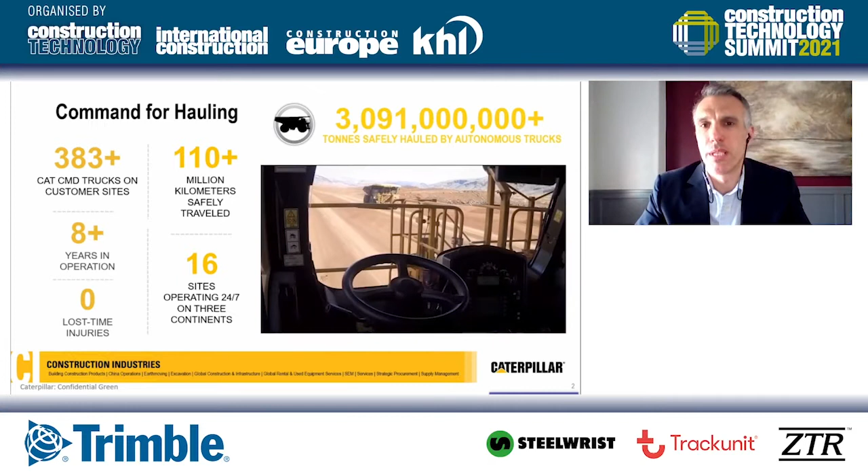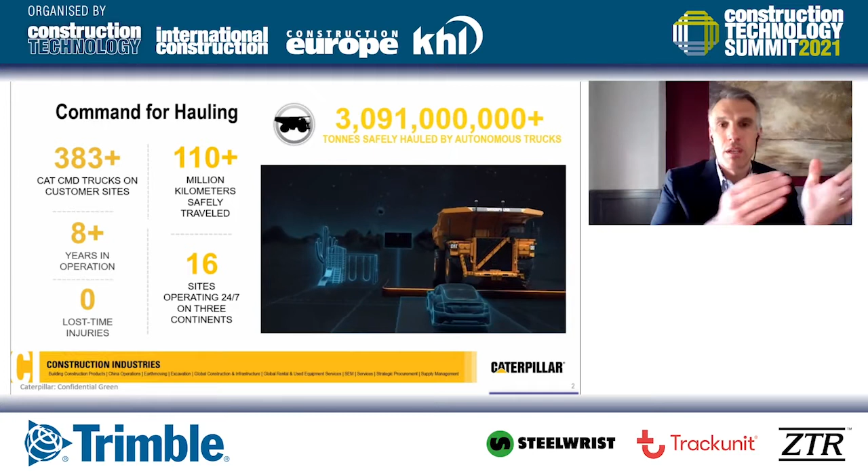As you can see, the stats speak for themselves: almost 400 trucks, 8 years in operation across 16 sites, running 24/7. They've hauled 3 billion tons over 110 million kilometers, and that's just the hauling piece. Of course there's also underground mining, drilling, and dozing in terms of autonomous solutions. So there's a lot of value there, and the holy grail of what autonomy brings is all that productivity with safety, with zero lost time injuries. That's really the great promise of autonomy - bringing both productivity and safety together. Typically you have to choose either one or the other.

As I'll go through the next slide, autonomy for mining was a very long journey. It probably took about 20 years to go from the early days all the way to having a commercial solution that could be scaled. In construction, it's going to be the same thing - a journey over time. Luckily, we've started that journey, and the poll speaks to it - many of you are on that journey.

That journey starts with automation, and you increase layers of automation until you have machines that can perform certain operations in an autonomous mode, or maybe even fully automated or autonomous at a machine level. At the same time, we need to make sure all the automated machines, and possibly the manned ones, are able to work together to automate the site. So keep three concepts in mind: we're on a journey of increasing automation, which will lead to machine autonomy, but machine autonomy is only one of the steps on the journey - really, site autonomy is the destination.

So if you were to ask, what are the three ingredients for autonomy for construction? We'll break it down into three main components. The first one is we're going to have to transform our machines into robots. And that's a journey that we've been on for a couple of decades or so.

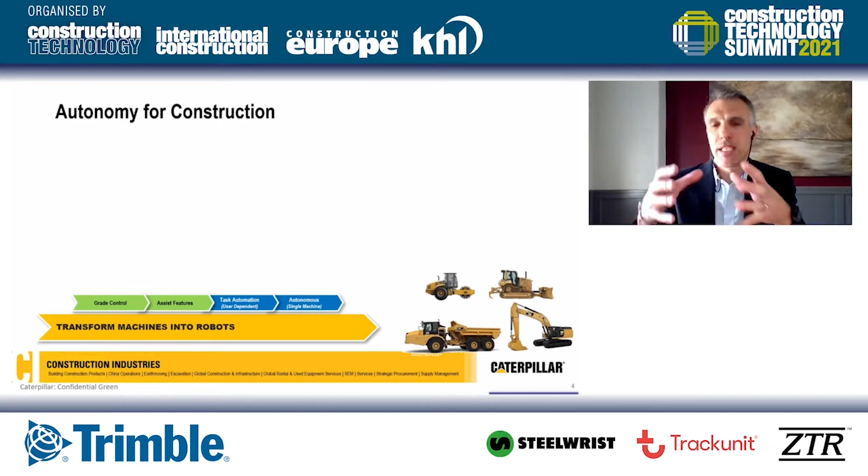Some examples of that are full blade automation with grade control. That is really a semi-autonomous function where the operator is driving the machine, displacing the machine, but the blade operation is fully autonomous. So that is a form of an assist function, and that is exactly how automation is going to manifest itself, as increasing layers of assist for the operators. Eventually, those assist features will allow task automation, and when we can automate several tasks, then we'll automate operations.

The second piece is, once we have machines that are semi-autonomous, or can perform tasks on their own for some period of time, we will have to make sure we can get the operator off the machine so that the same operator can tend to several machines at the same time. That's really where we've coined the phrase, turn the operator into a commander. And that's an offering that's available today.

We're debuting this year the command station, which allows operators to operate several machines of different sizes and types, switching between them with just the push of a button. So imagine, for example, if we picked the excavator in this image, and that excavator could auto-trench for probably 15 minutes on its own before it needs some assistance from the operator.

If the operator's in the cab, then we really haven't maximized our operator's time. But by placing the operator into a remote setting that could be 300 yards or 300 miles away, now that operator can get the excavator auto-trenching and then take control of another machine, possibly a manned machine, and now they can be operating two machines at the same time.

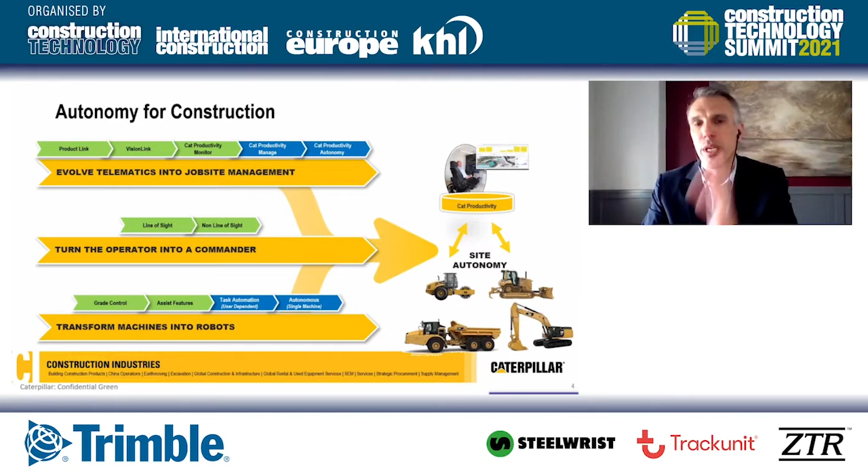As we started with telematics, we evolved telematics into really what today is a job site twin. And then we're going to move from monitoring capabilities to predictive or prescriptive capabilities, and then eventually controlling the autonomous machines. So you can see in green what is commercially available today, and in blue what we are developing, with the intent of developing simple point solutions that you can deploy easily into your job site without disrupting much of your existing processes.

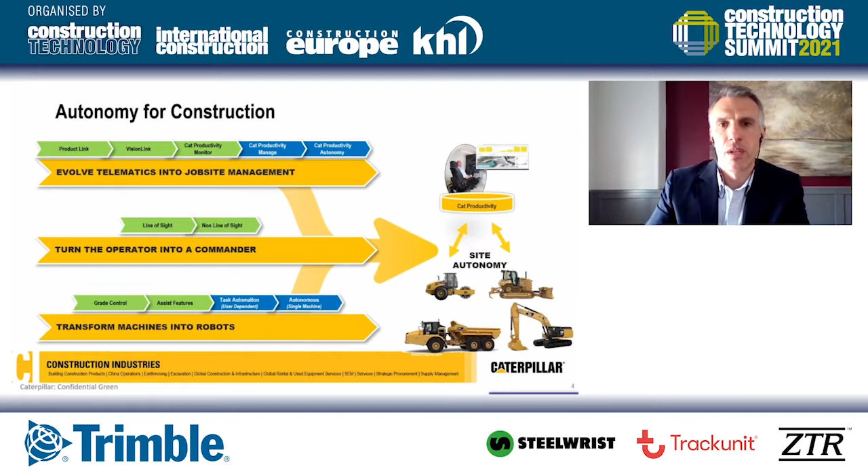And then once you've been able to incorporate one of these technologies, you can extend to the next one, and the next one, and over time turn your job site into an autonomous job site. So let's look at a short video that will show an example of how this could come to life. Let's go.

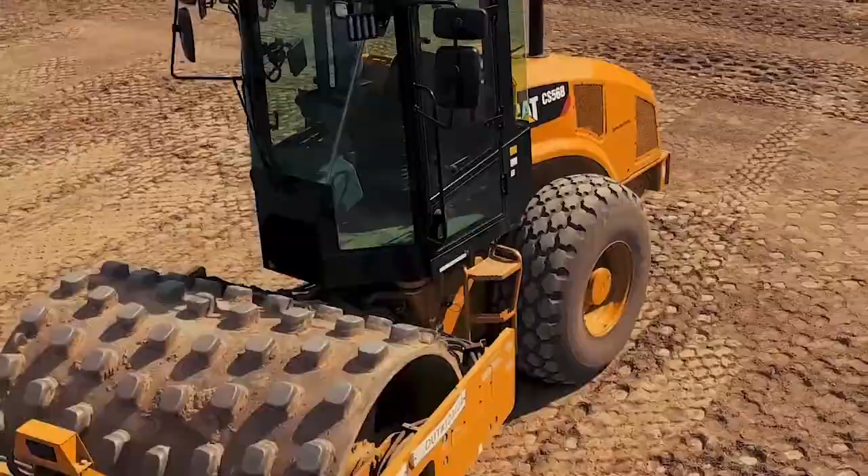Caterpillar's roadmap to autonomy consists of three main technologies: robotic machines capable of executing missions in full autonomy, the use of remote control capabilities to shepherd the machines around the autonomous job site, and a back-office software that creates machine missions in order to achieve the goals of the day.

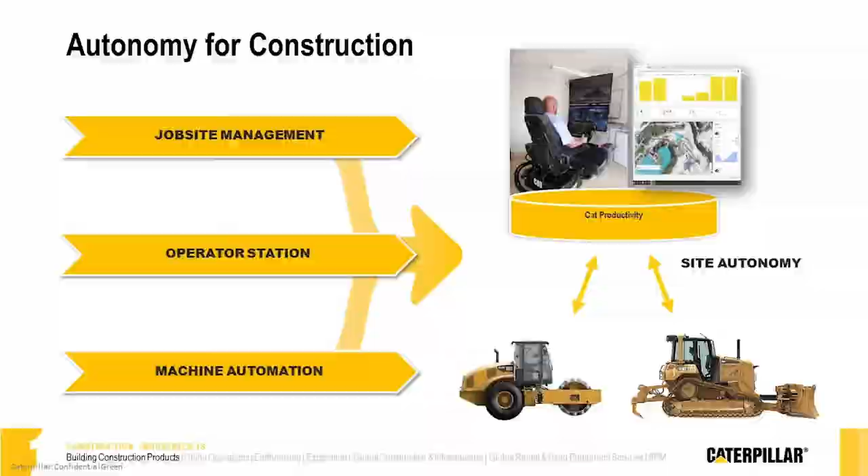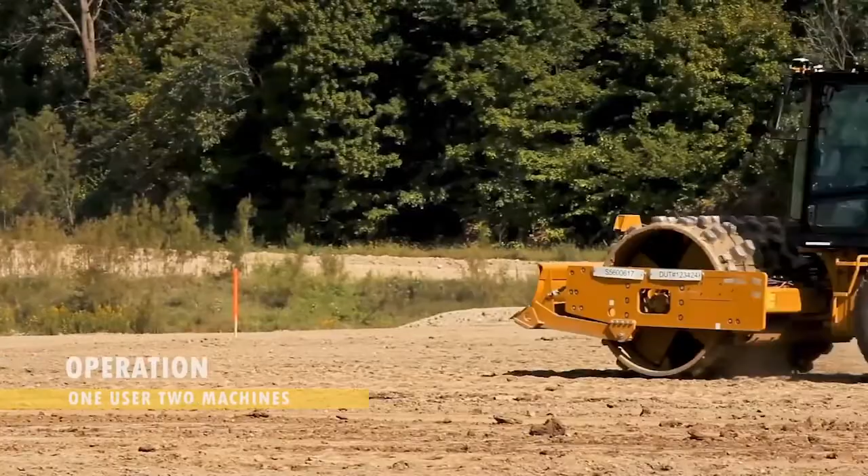In the following sequence, you'll see how these technologies come together to enable a single person to use two machines simultaneously to perform a grading operation. The process begins as the project engineer creates a task for the field teams to execute.

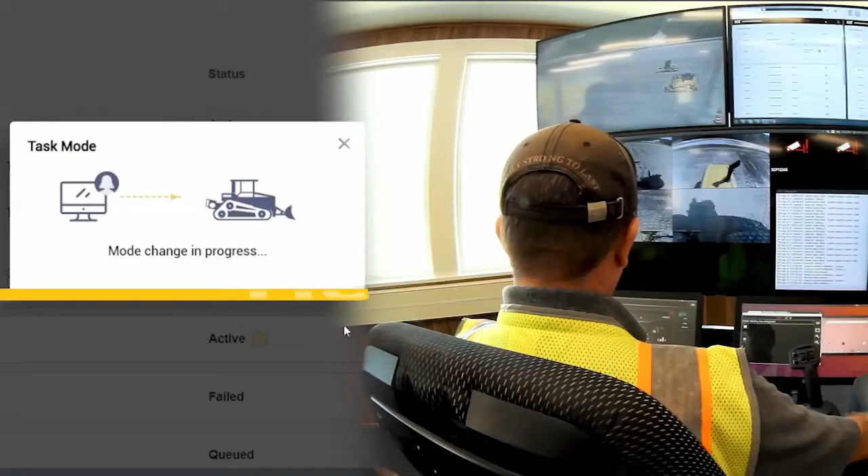The task is later accepted by an operator who uses remote control to perform the grading operation using a highly automated tractor.

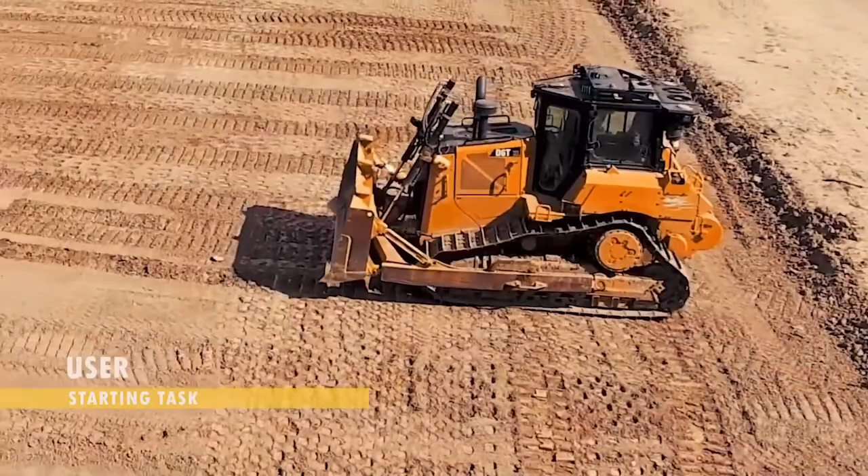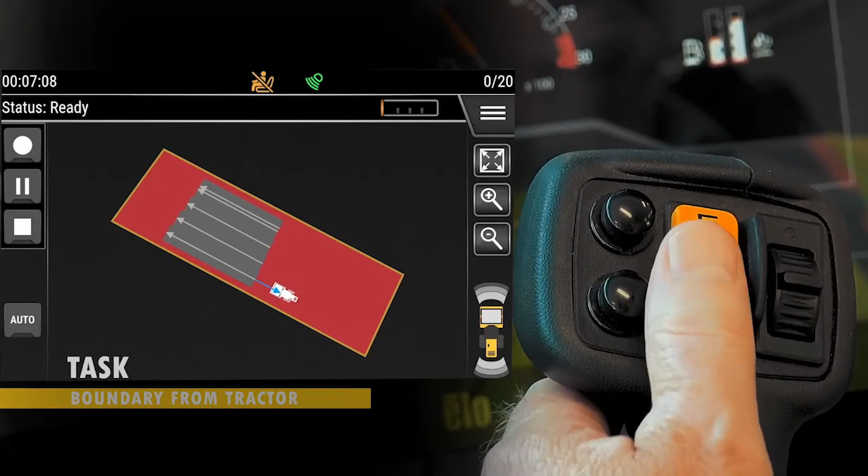The back office continuously monitors the progress made by the tractor. And as the tractor levels out enough ground, the back office creates a mission for the compactor to execute. The operator receives the mission and dispatches it to the autonomous compactor.

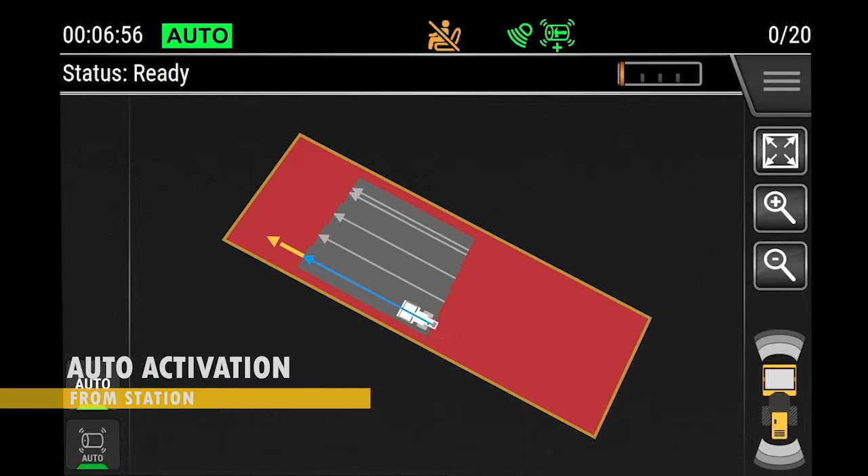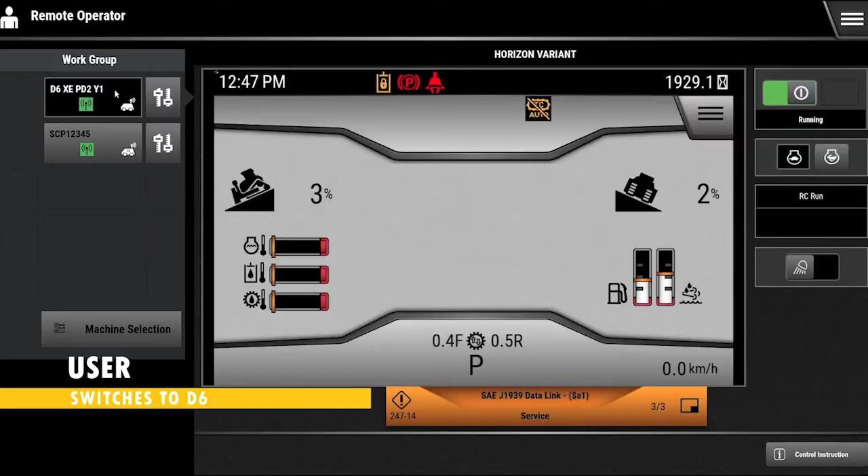The compactor receives the mission and determines how best to accomplish it. As the compactor begins to work autonomously, the operator takes back control of the tractor to resume grading. As he makes progress with grading, the back office AI will be sure to dispatch the compactor to follow.

This illustrates how back office AI, remote control, and machine autonomy come together to enable a single person to operate multiple machines simultaneously.

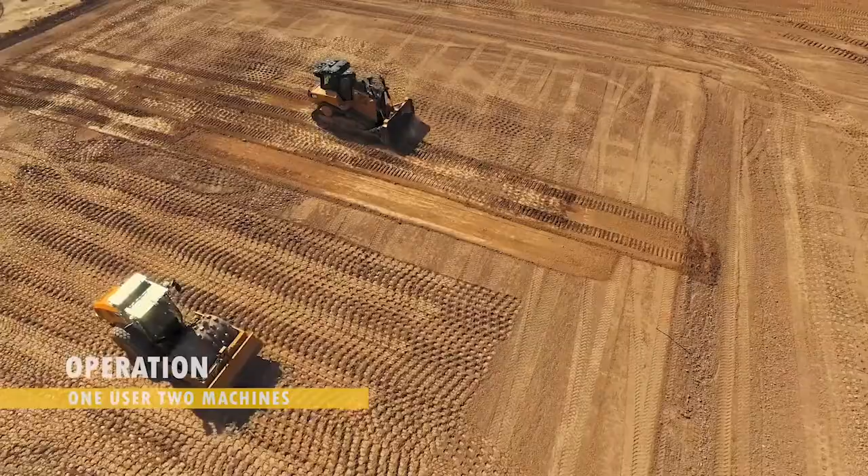Excellent. So I hope that video really brought together what we came up, this high level journey, breaking it down into the three components. And hopefully that video showed how a simple point solution that brings together several machines, an operator, and a back office come together in a way that is simple and deployable into a construction environment without too much disruption of your existing processes.

So as we look at the journey, we've broken it down a little bit into macro blocks, and it started with machine control and guidance. So if you were to ask, what do I need to do, or how do I get on the road to autonomy? It sounds like from the polls, most of you are already doing the right things and really starting to digitize your job sites.

On the OEM side, you will see an increased release of features of this automation and assist type. Remote control is a major release for us. It's a major stop on the road to autonomy, and it's something that for us unlocks value immediately, allowing you to be safer, to address a lot of your operator challenges, and produce more in many occasions.

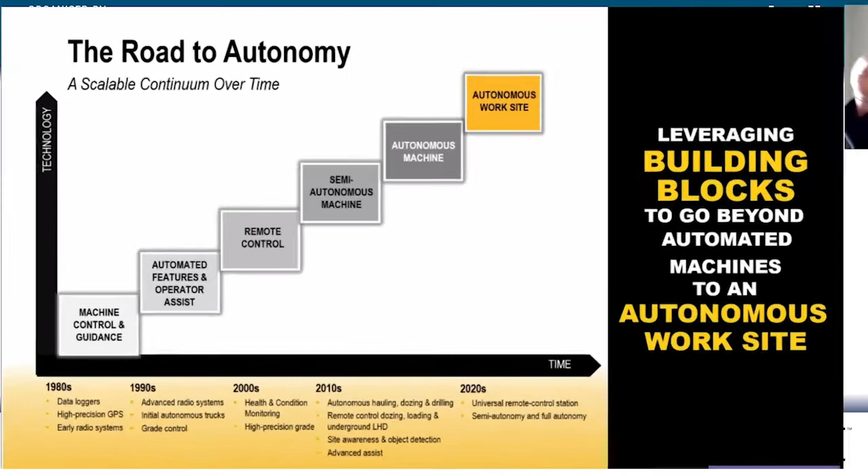So that is a very important offering, a milestone for Caterpillar moving into the remote control space. And that allows us to then develop and release many semi-autonomous functionalities on the machines, eventually have autonomous machines and then an autonomous work site.

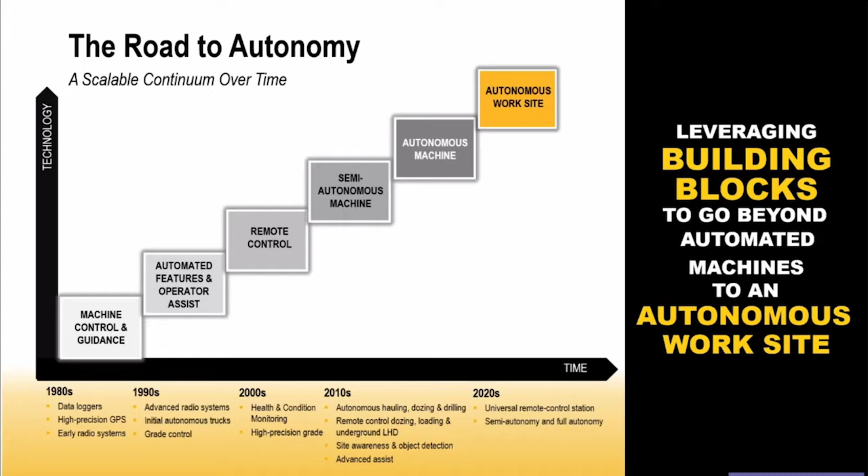We like to think that, again, the future is now at Caterpillar. We have distributed throughout the world our R&D and customer support capabilities around automation and autonomy, driven by the journey that we've taken with mining. And then for construction, we stand again on their shoulders and are now well into our own journey for automation and autonomy in the construction space.

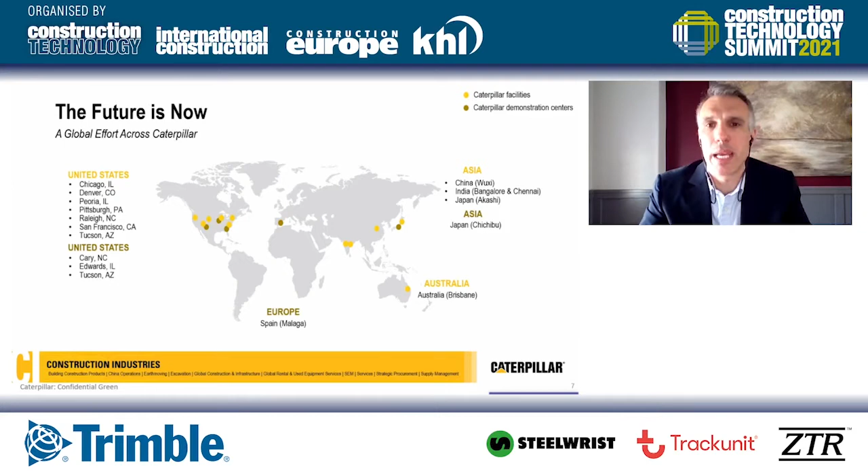So Alex, that's the content I had planned to share, and I turn it back over to you. Right, well thank you very much indeed, Fred. That was very interesting. We have some questions which have come through for you already on the website.

If equipment on a job site is from different OEMs and different tech companies, will the equipment be able to talk to each other? If not, is this a barrier to autonomous sites? No, absolutely. That's probably an issue we're going to have to tackle both as an OEM, delivering solutions that are compatible with the different makes and types of equipment on the job sites - not all of them are made by Caterpillar. And we're also going to have to tackle that as an industry. Of course, it's going to take collaboration between the different OEMs to come up with solutions that are site-centric and will work together to produce value for the industry.

Okay, another question. What are the legal ramifications with autonomous equipment? It's an interesting question - if something goes wrong, who is liable? Yeah, that's certainly an aspect and a question that is on our mind. There are some precedents in the mining space. We are seeing different types of regulations in different parts of the world, and that is one of the challenges, it's really not homogeneous throughout. And while there isn't necessarily legislation around autonomy in construction today, we're sure to see one soon. And then in terms of liability, that's something that's heavy on our mind. There is somewhat of a perceived liability shift, so we're very conscious of that as we design the solutions.

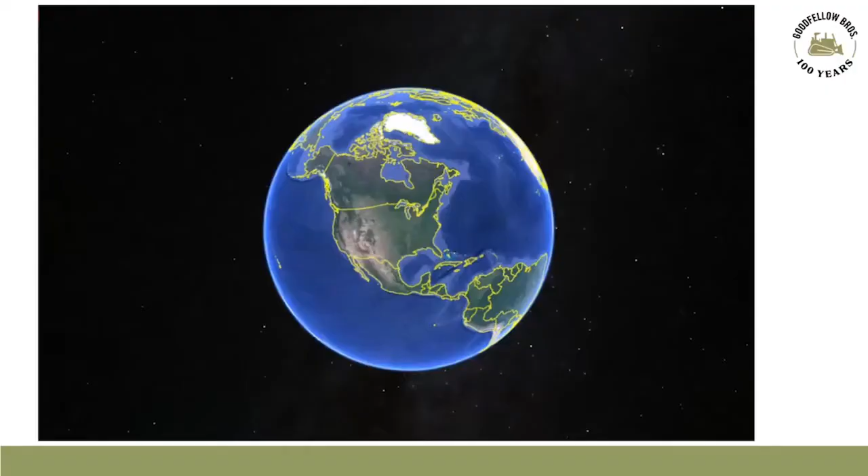So using machine control in remote locations, I thought this was an interesting one to start with, due to the fact that not only are you using machine control, but you are totally in an isolated area. We did an infantry platoon battle course project on the islands, and this is out in the middle of nowhere. To give you an idea where we're at, it's on top of a mountain, and it would take hours just to get to the site. Then once you're there, here we had our site.

To show you how complicated this site was, our entrance to get there was all on dirt roads. On military bases, you can only drive at 10 miles an hour, so it took another 45 minutes after you got to the entrance just to get to the project site. So there was our first dilemma of just traveling and all that. You needed to really make sure you had everything you needed when you got to the site.

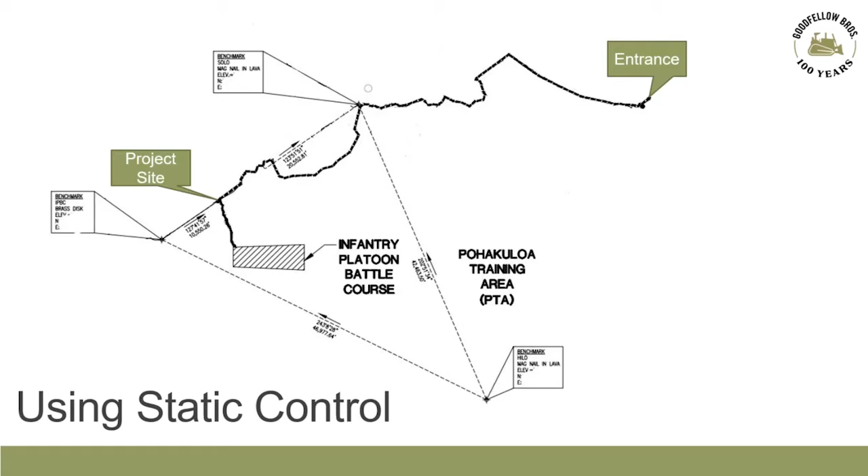Then on site, they only gave us 3 control points. So how are we going to lay this out so we could actually get a calibrated site? We worked with the surveyors and teamed up our resources, and decided to do static control. There was no use of cell phones, no radios, no communications at all.

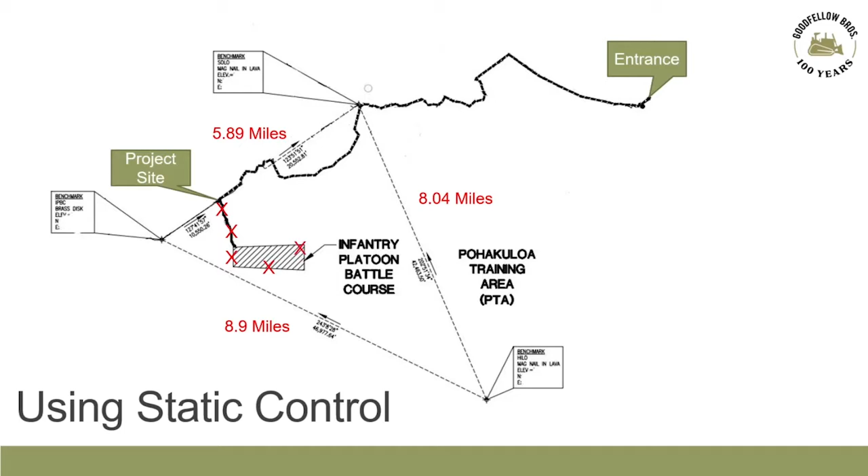To show you the extent of this project, they gave us 3 points that were 5.89 miles, 8.04 miles, and 8.9 miles apart. We literally had to pre-time everything, figure out how to get there, all on gravel roads, driving at 10 miles an hour. So we predetermined our start time, our stop time, and set a few extra control points throughout the project, and then we were able to calibrate the site all within the computer in the office after gathering all our static control. With that, we figured we probably saved about $30,000 to $40,000 just in how we set up the site.

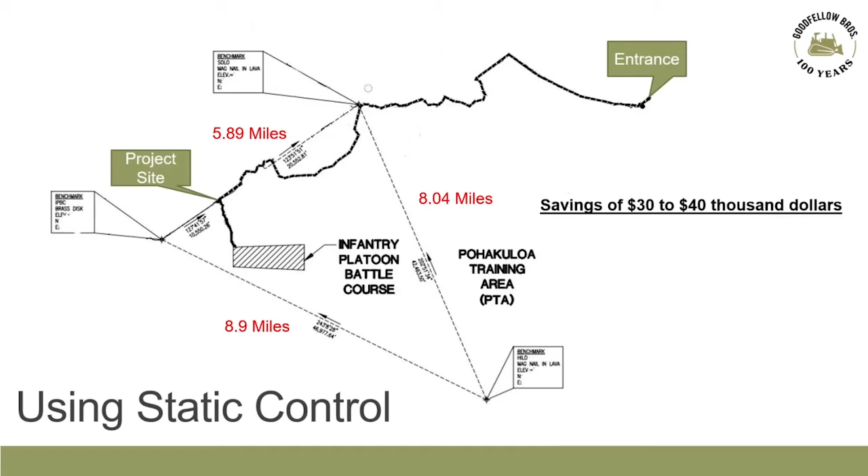Here you could kind of get a rough idea of what the site looked like. Just try to imagine sending somebody out there on foot to stake out the road, or for anything for that matter, just sending somebody out there. In this case, we're able to load the model up into the machine.

One of the things I like to talk about also is avoidance zones. A lot of people don't know what they are or don't use them. Here in Hawaii, we use them a lot because we have endangered species - plants, trees, etc.

We have grave sites, lava tubes everywhere that are, for some reason, an archaeological site inside of them. So we have to avoid those at all costs. We're able to actually load up those zones into the machines, and if the operator gets too close to them, it would literally turn the screen blood red and send out a beep, notifying that you're getting too close to these. So machine control was very critical to find these sites without actually having to go out and stake them and put up flagging around them.

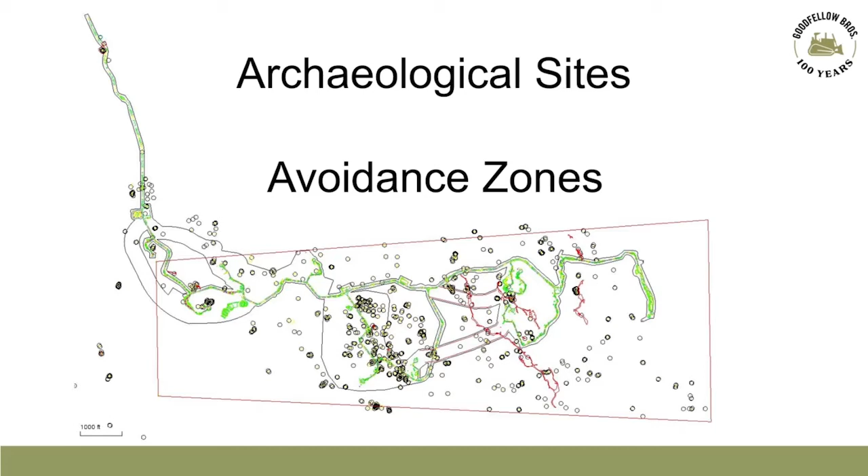In this case here, we were able to literally just load up the site into the machine control, and the dozers were on their way grading the roads. You can see here in the upper left-hand corner, that's our layout yard. So that whole thing you see there, all those roads, is what we had to build.

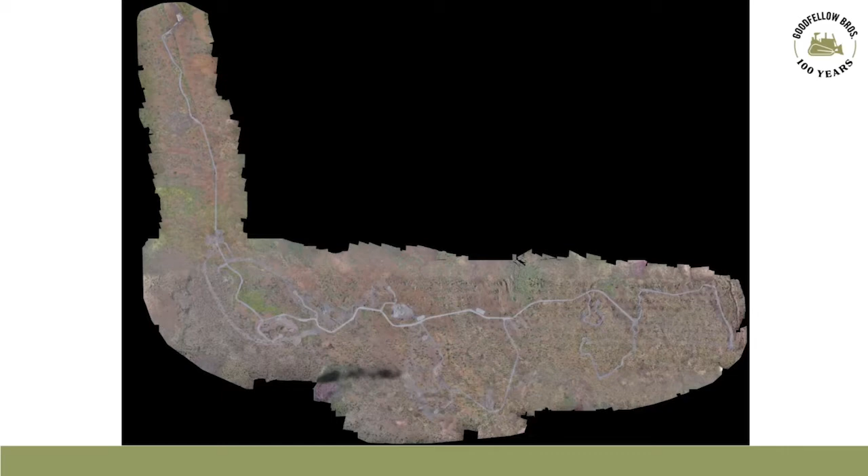We had to use many repeaters out there. We would find spots up on a hill where we could get phone reception or something like that to make a call. It was a very unique and challenging site.

Here you can kind of get an idea of how it was on the layout and how the ground looked after we actually got it all graded out. You can see the terrain—it's not a very friendly terrain to be sending people in on foot. So using machine control in this area just worked out great because, again, we just load the models up and the machines were able to go right to work and start laying this stuff out, and we didn't have to have somebody out on the site.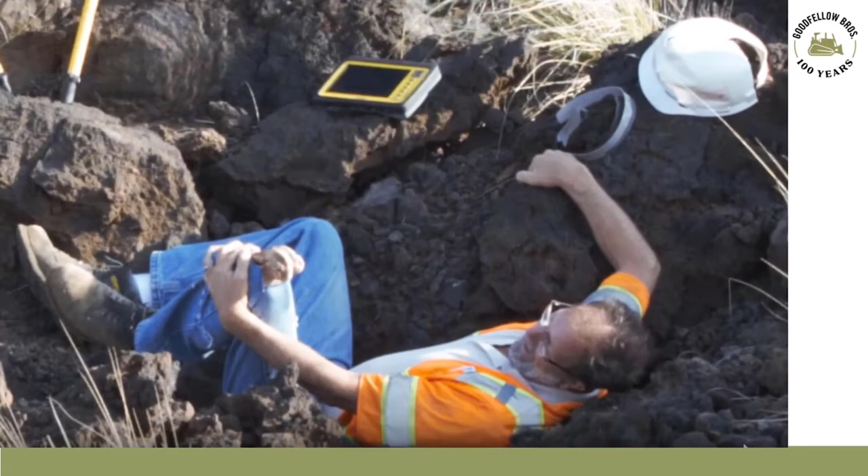Next thing I'd like to talk about is safety. Sending somebody out there to lay out that center line or run topos or do anything the conventional way out here in Hawaii is just really dangerous. You can wind up having somebody fall, break a leg—it could be really dangerous. So essentially, safety is a big thing that you save with machine control.

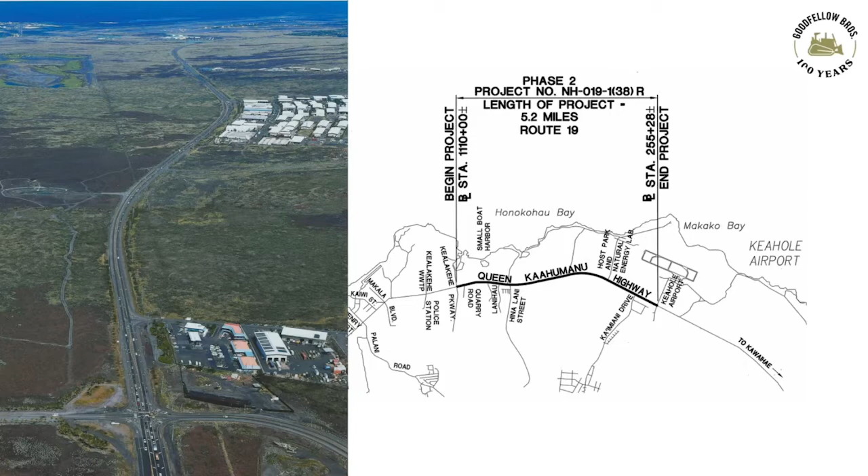Next one I'd like to talk about would be the 3D milling and paving. This job here, I'm going to call it just the Queen K highway widening—please don't ask me to pronounce that, I still have problems with the Hawaiian names. But Queen K highway was another interesting project. It was basically 5.2 miles of road, and we were taking an existing lane and adding 2 more lanes to it. So basically we had a north-south lane, and we're adding 2 norths and 2 souths to that, as you can see in the photograph here on the left-hand side.

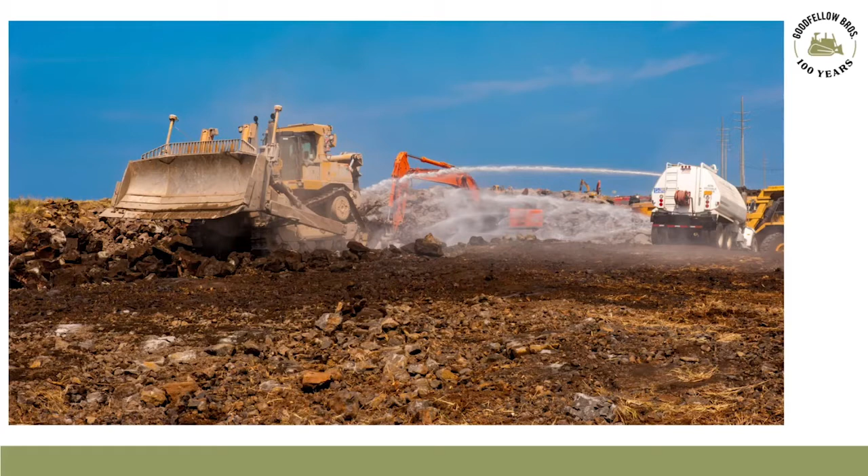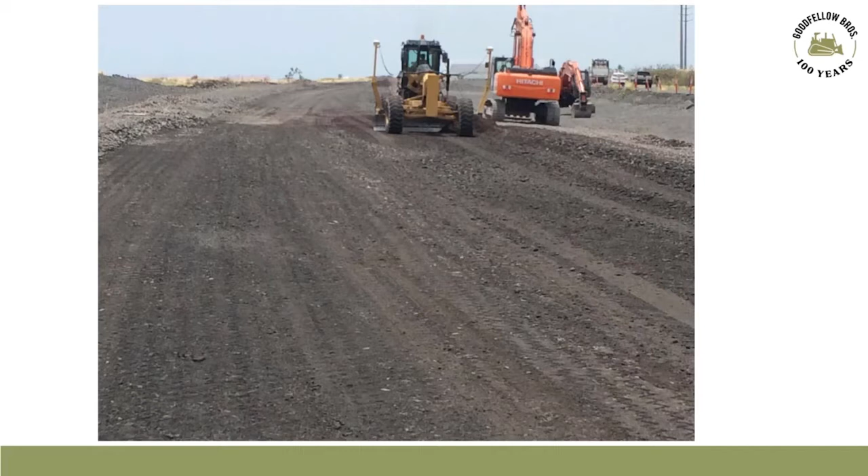So essentially, using machine control, no staking, no nothing—we loaded up the machine, started grading the site, clearing it, all using machine control. Again, safety is a major factor because the operator sees exactly what he needs to see inside the machine and never has to leave the safety of the cab, and we don't have to have somebody out on the site staking hub and caps. I remember laying out these roads with hub and whiskers, putting those out every 25 feet. Those days are long gone, and we no longer need to deal with that.

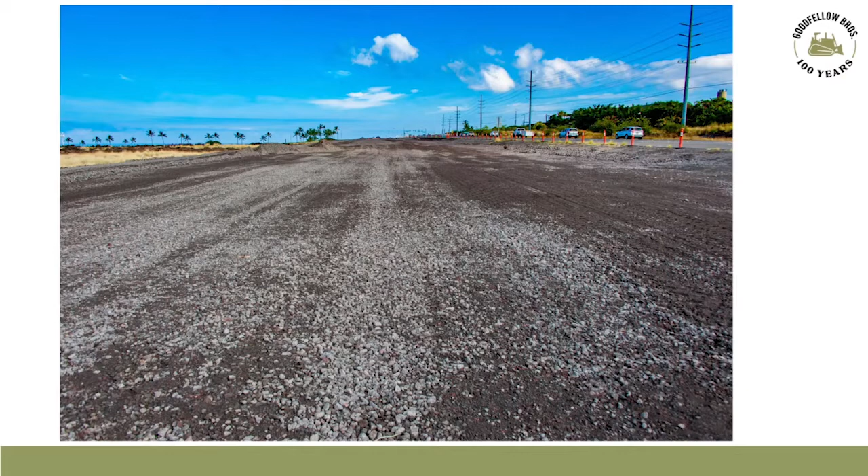So here's an example of what we were dealing with. We had an existing road with a crown of 2% on it, and what we're trying to do is maintain the existing asphalt structure—the integrity of the asphalt—and 3D mill it down. So we're going to have a 1.5 inch lift on this, and then we can mill down from that to get our cross slope of 2%. It was a little bit of a challenge getting my mind wrapped around this, but essentially that's the plan. In reality, though, this is what the road actually looks like.

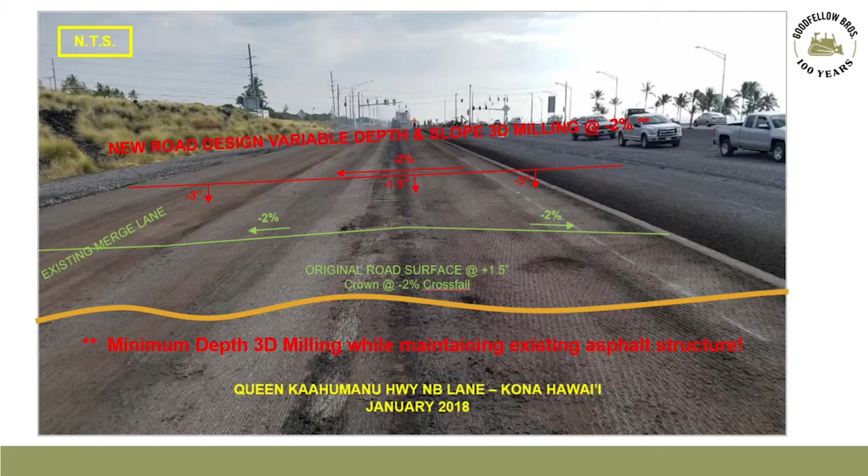So it's a lot more complicated than what people seem to say it is, because your 2% is never actually 2% after that road's been there for so long. So essentially what we're trying to get across here is to mill it down so you can see it in different sections like this. Then we're able to 3D pave it, fill those sections back up, and have one continuous slope across the road.

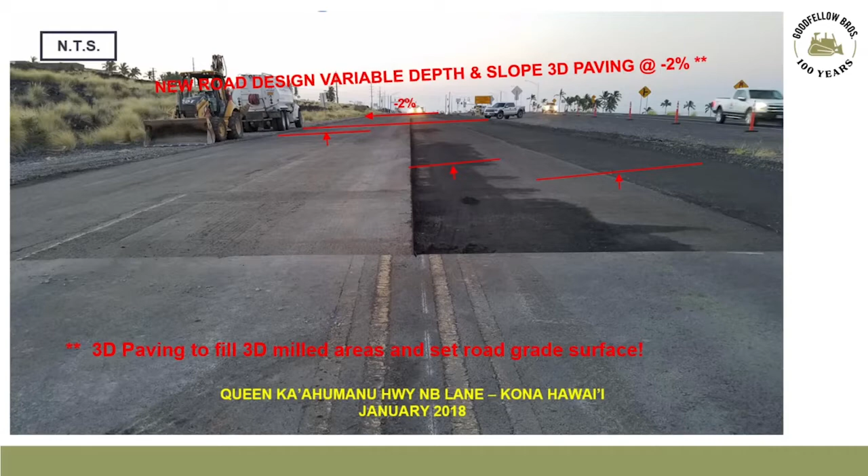In this case here, it took us 52 different areas that we had to remodel that surface and adjust it. And so we made a 3D model based on this with the 52 areas, which became one total surface, mind you, and loaded it up into the 3D milling machine.

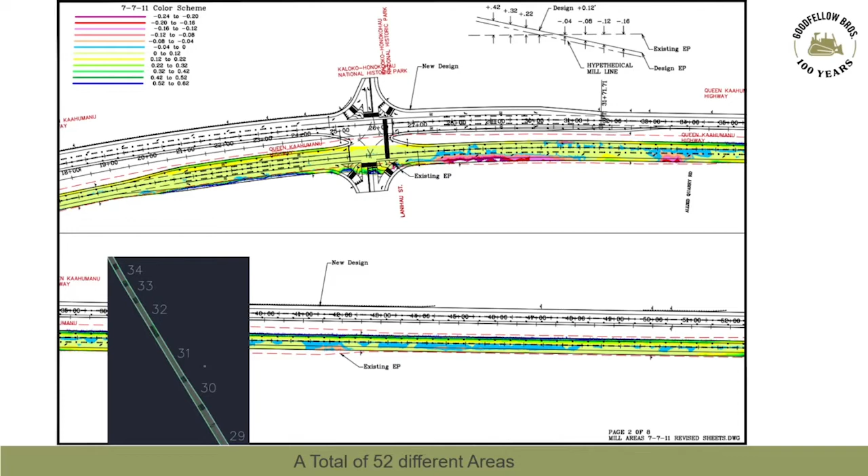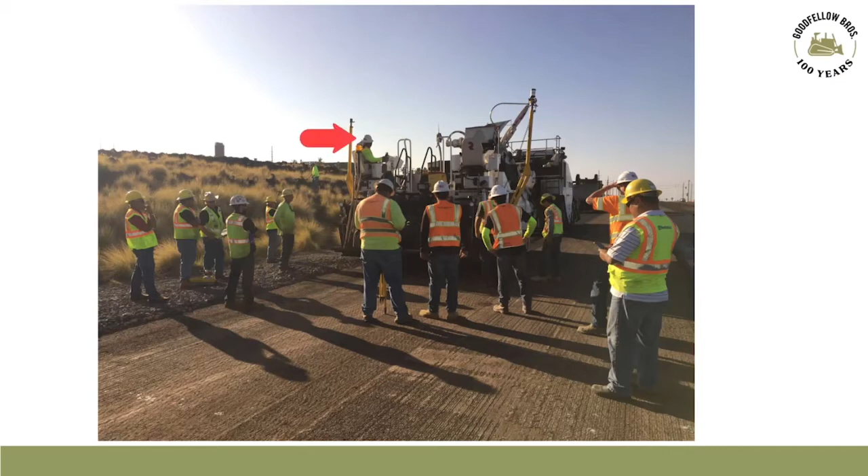All the work was done in the office based on these formulas. And then when we got out to the field, we just loaded it up into the machine and the 3D miller started to go to town. This picture here always cracks me up because when you get out there, you got the operator, you got the checker, and then you got 12 others standing there watching to see how this is all going to work.

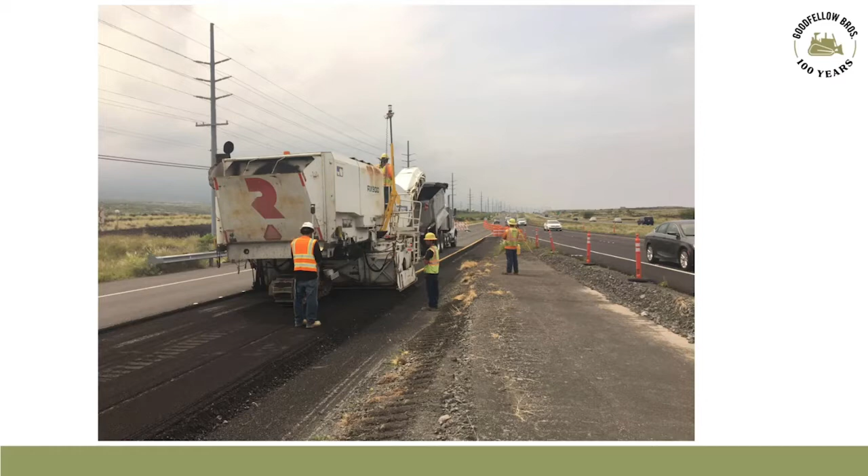Then here you can see we're starting 3D milling and everything's cruising. We actually had up to 10 total stations, and the milling machine would leapfrog from one total station to the next as we were going.

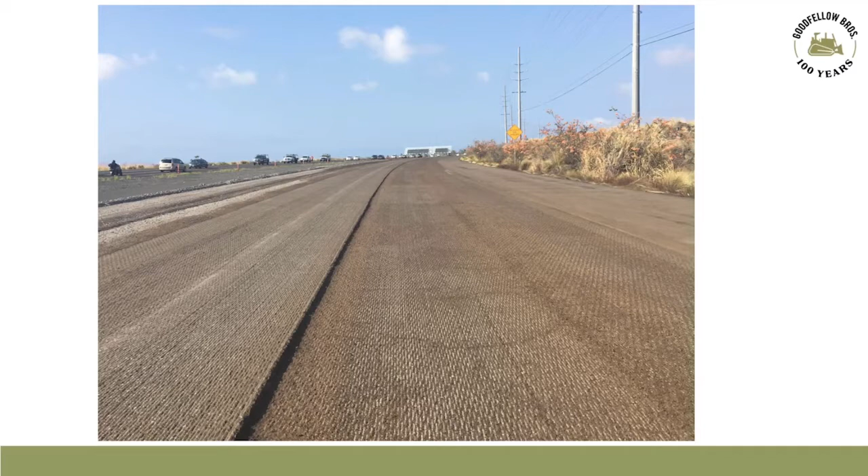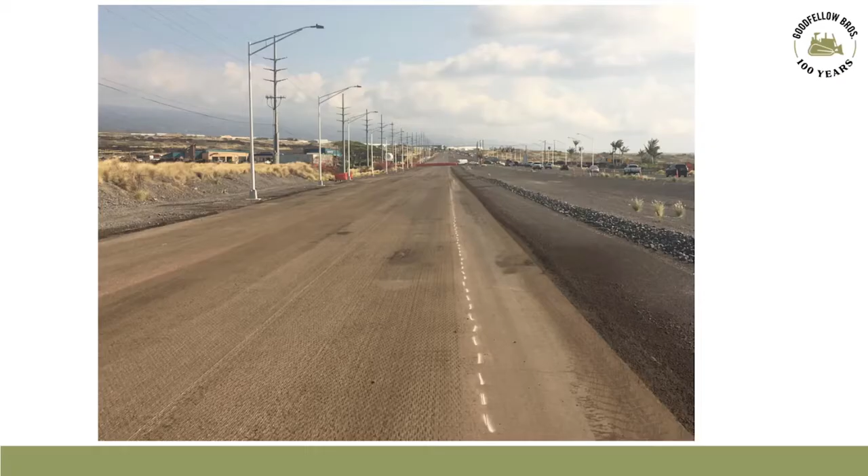I was told that in the straightaway sections like this, we were averaging between 60 to 80 feet per minute of milling. And then we came back, and you can see here how we're using the same concept now.

You can see the tower on there on the 3D paver. So it was leapfrogging with the same total stations and everything, but we're 3D paving now, filling in each section and then building it up so that we could have that consistent 2% cross slope all the way across the road.

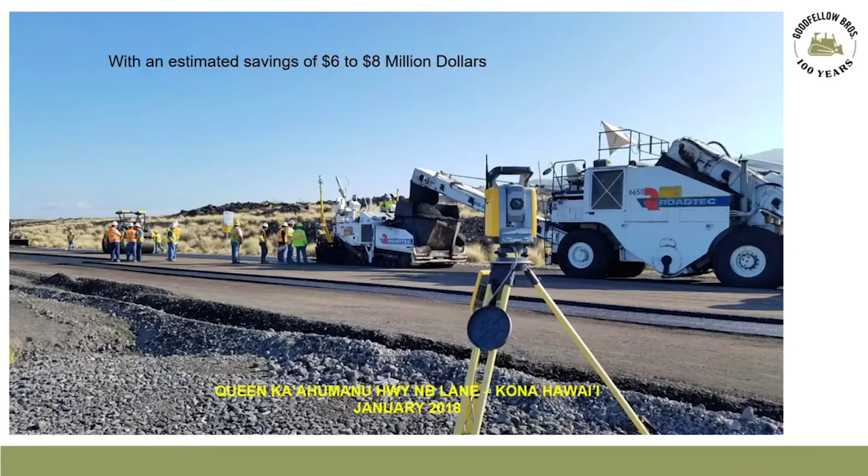So with this job here, we have an estimated savings of approximately $6 to $8 million. There are a whole lot of other factors involved in this, but by us saving the integrity of the existing asphalt that was already there, it allowed us to win the project and save millions of dollars on doing so. And that would be the conclusion of that.

Well, that was great. And we're delighted to have James with us from Hawaii. Whatever time is it with you? It must be the middle of the night, James. It's 4:30 in the morning here. So either late night or early morning. Thanks so much for being with us. We have a few questions for you.

First of all, you mentioned $6 to $8 million in cost savings due to using tech. Can you give us a bit more detail about how these savings were achieved? Well, basically, like I was showing in the video, the original concept was to rip out the existing road completely and then rebuild it, which is 6 to 8 inches of asphalt there, totally rebuilt. Versus 3D milling it down the way we did, we were able to minimize that asphalt that we have to replace and utilize the existing structure that was there. So in reality, it was a design build. With the design build, we were able to adjust the elevations to match, and that's how we had to come up with 52 different areas of the surface.

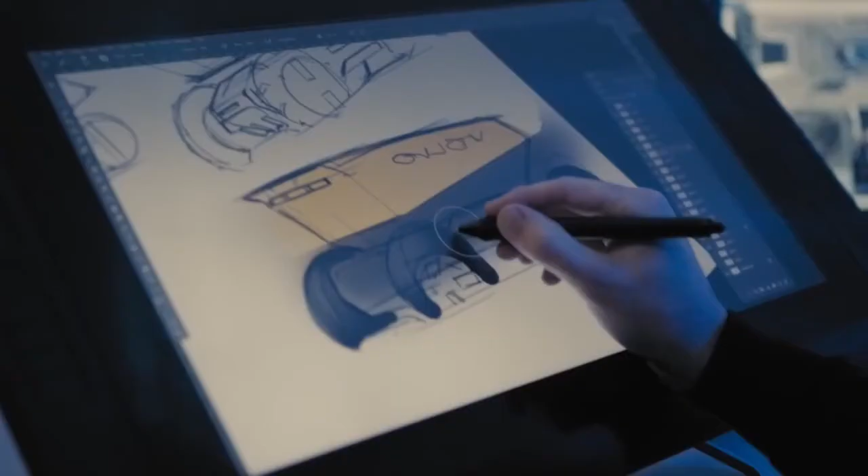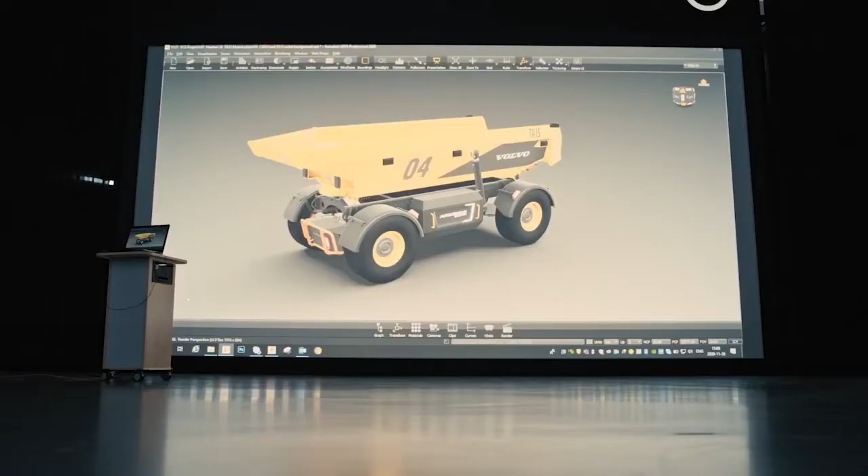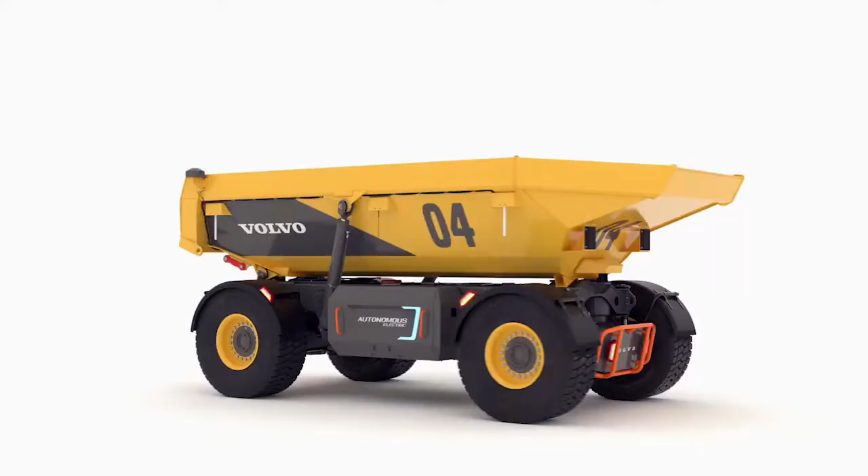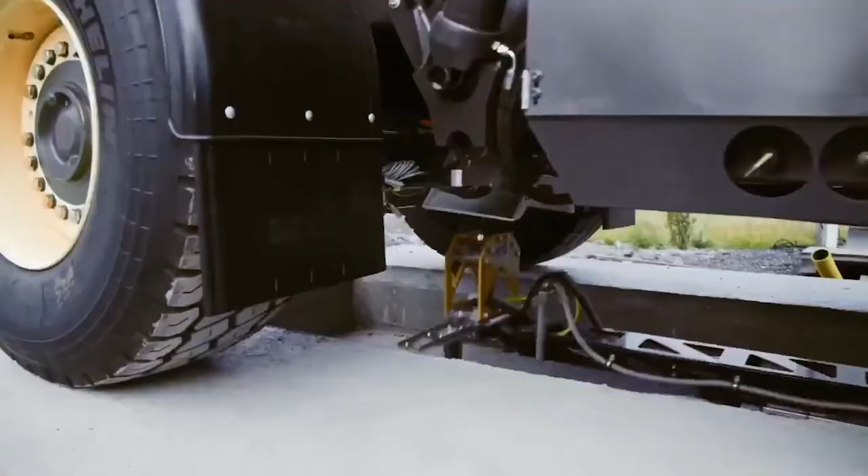Isn't it funny how day by day nothing seems to happen? But when you look back, everything is different. That's the story of Tara. Volvo has always been on a journey, always evolving. Sometimes small steps are taken, sometimes big leaps. With Tara, we understood it's time to start something completely new and trust in the magic of beginnings. To try new things and not be afraid of failing. A group of talented engineers and designers brought our ideas to the table, supported them, and challenged them. After a while, the clouds parted and we could see where we were going. As our clarity grew, so did our confidence in this radical new solution. With collaboration and energy, our visions quickly came to life. This isn't just new technology, it's a whole new way of doing things. As cool as the TA15 autonomous electric hauler is, Tara is not only about individual machines, but a whole transport ecosystem that offers greater safety, improved productivity, much lower emissions, and a lower total cost of ownership. We failed at plenty, but we also learned important lessons along the way. As Albert Einstein once said, a person who never made a mistake never tried anything new. Welcome to the future. This is the story of Tara.

So autonomy is not a far-off ambition, it's available today. We have broken it down into smaller challenges based on the complexity of the ODD, or the operational design domain. In these easier ODDs, there are certain constraints and conditions on the sites where the machines are used. A quarry, for example, may only extend over a square kilometer in a clearly confined area with just a few haul roads. Controlling machines in this environment is different to solving the problem of autonomy on every road in a public network. When you can limit the scope of your operations, you can fast-track the technology development because you have a lower number of potential hazards the machines will encounter.

At Volvo Autonomous Solutions, our goal is to lead the industry into more sustainable, safe, and productive solutions that both customers and society will benefit from. This is about complete site transport solutions for autonomous applications. It is not about the individual machines alone. This opens up for new business models such as transport as a service.

So a Tara transport solution consists of several TA15 machines plus their required infrastructure. This infrastructure can include charging stations, the autonomous driving system with its connectivity, and also connected cloud solutions. It also includes maintenance and repair support, safety infrastructure, finance solutions, and a manned control room to oversee the operation.

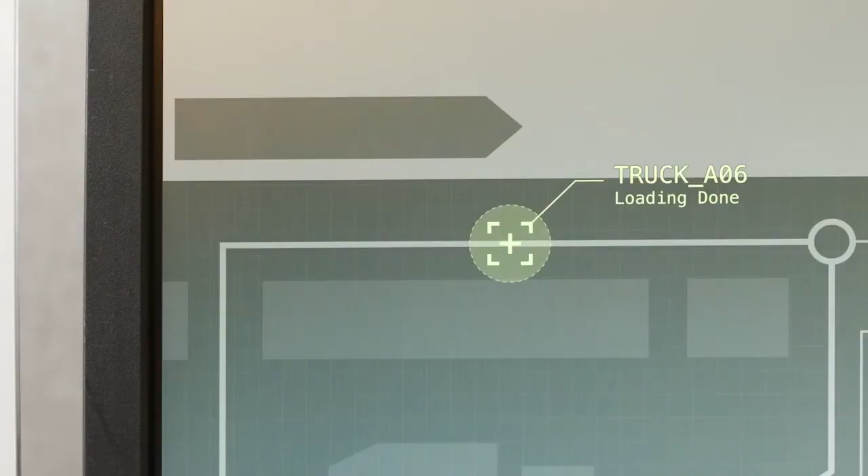Transport is the lifeblood of society, and we are at the start of a paradigm shift in transport that will reshape it. Our vision for transport in the future is one of highly efficient and integrated systems, connected infrastructure, and intelligent vehicles. We are therefore constantly researching and developing new innovative solutions that are safer, give increased productivity, and reduce environmental impact.

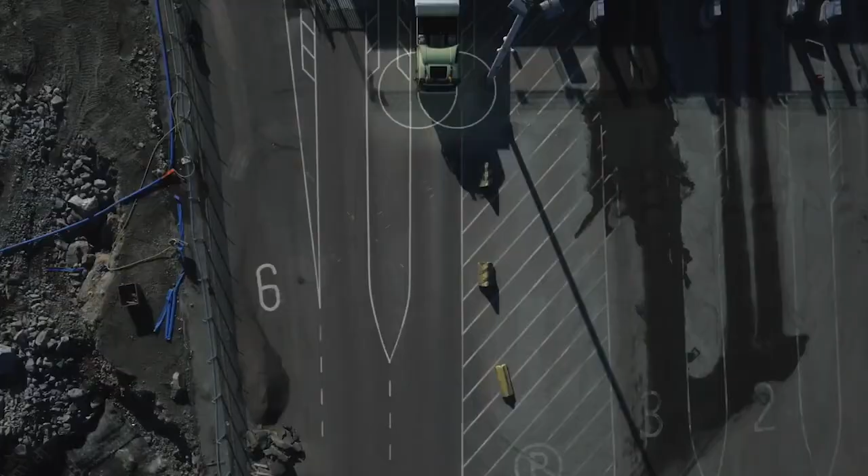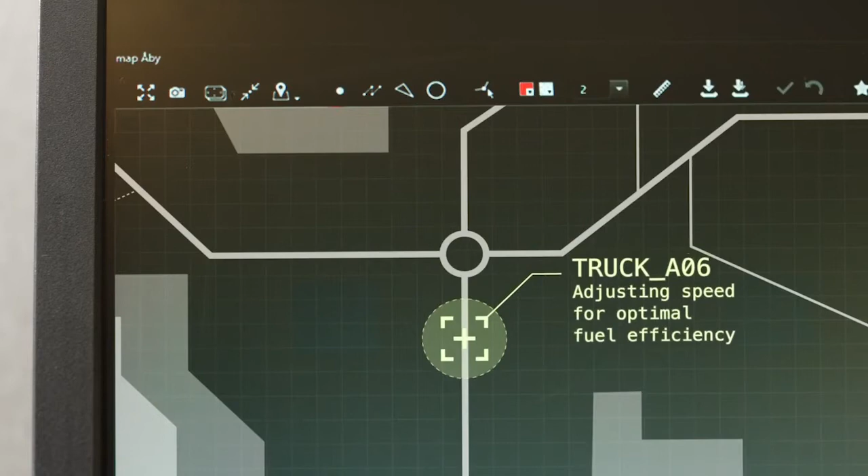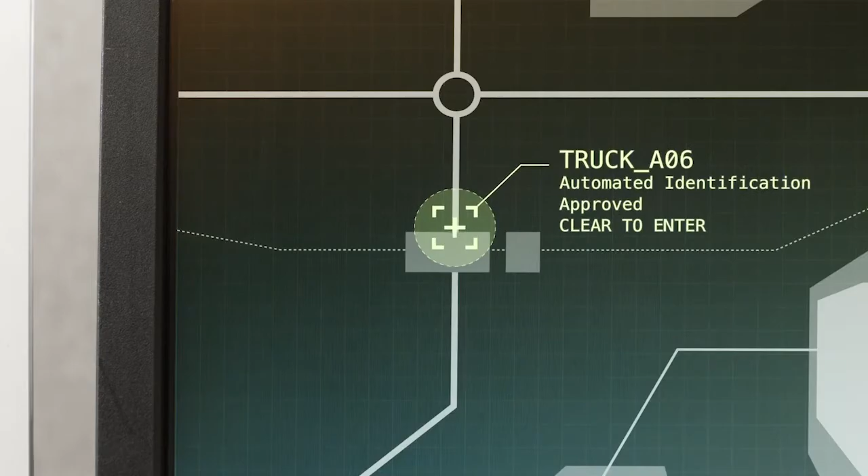Outside our cities, in semi-confined areas like harbors and dedicated autonomous truck lanes on highways, our research takes the next step to evolve innovation of autonomous trucks. The knowledge we gain will help us develop automated functions that fulfill our high safety standards. Connected to the cloud, we will link people, vehicles, and logistical partners, no matter where you are. It's never about technology for technology's sake. It's about how technical development can actually benefit customers and society.

Right, well, there we are. Thank you very much indeed, Johan, for that presentation. Lots of questions, just a few of them, if you could answer. How can this technology be transferred to other non-closed job sites, industrial complexes, residential construction?

What is defining a closed job site? In Volvo Autonomous Solutions, we have defined our safety levels, and I won't have the chance to go through them today, but we have certain levels that we are working on one by one, and the technology can for sure be used in several of those safety levels.

How close are you actually working with other parts of Volvo on this, and what are the crossovers? We are working very close to the whole group. We are like a startup in the big Volvo group, so we have tremendous support from the truck organization, from the construction equipment, from our process and IT. So all of Volvo is supporting us.

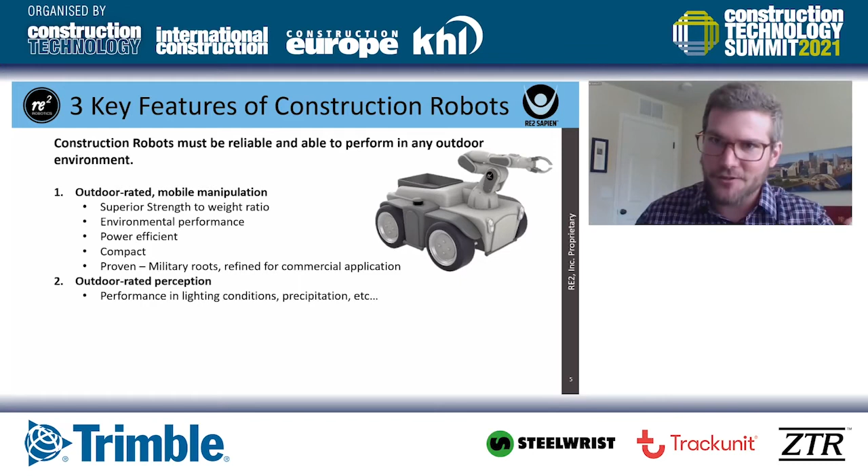Next major topic is this robotic system has to be able to see outdoors. And while a lot of us take this for granted, it's a very challenging task from an automation standpoint. Again, comparing and contrasting the industrial environment versus the mobile environment, a lot of the computer vision technology that's been developed for the industrial environment relies upon clean, fixed indoor lighting. As soon as you introduce sunspots due to glare or shadows due to clouds, precipitation, a lot of those perception algorithms fall apart.

So you need to rely upon someone who has experience in the domain of outdoor perception technologies to overcome a lot of those challenges. And then third, the third key area that I want everyone to focus in on is making sure that the technology is AI enabled. So much like I believe Fred and actually James alluded to it in his presentation as well, as you've got your model, but then you've got the real world that you have to deal with. And oftentimes the two don't necessarily coexist. So you need something that's going to be able to take that model and apply it to an imperfect world.

So you've got to be able to adapt to changes in the terrain due to rocks that aren't necessarily a part of your 3D model. Something that's scalable, that's able to address a wide variety of componentry.

In particular, I'm going to talk about solar module manipulation. And while all solar modules more or less look the same, they do have their nuances, their differences. Ideally, you want something that's able to scale across all of those different objects without having to reinvent the wheel. And then the last bullet point is oftentimes customers want something that's digitally traceable to ensure the quality with which something has been constructed. That helps prevent a lot of litigation long term because we can digitally certify how a particular system went together.

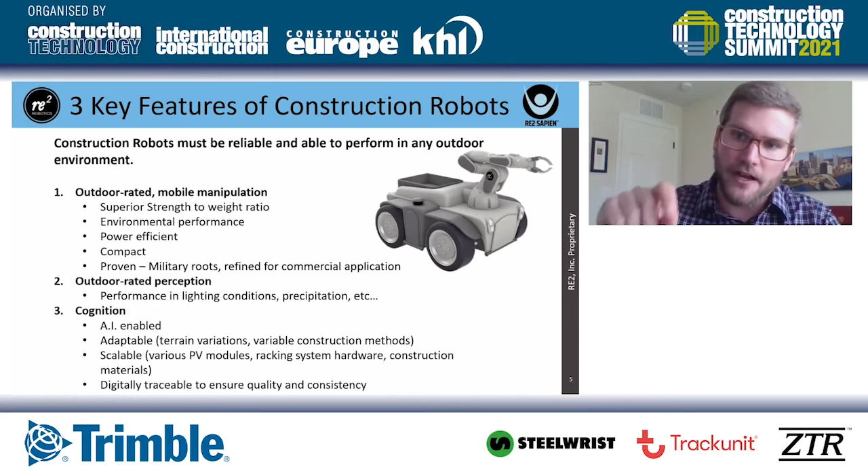As a fairly brief case study, I'm going to talk about one particular program that RE2 announced earlier this year. We refer to this program as OAMP. It stands for Outdoor Autonomous Manipulation of Photovoltaic Panels. This is a program that we'll be leading in conjunction with not only the U.S. Department of Energy, but also a wide variety of industry partners within the solar industry, where we're going to be improving worker productivity, safety, and quality when manipulating photovoltaic panels.

So I'm going to speak to basically 3 different layers of value that we're providing in this application, and then give you all a glimpse as to what the solution will look like.

First, from an operator perspective, this is really demanding work. For a given solar plant, there could be hundreds of thousands of modules that a worker is going to be placing. Each of those modules weighs anywhere from 55 to 75 pounds each. So if you can imagine day in and day out placing hundreds of thousands of modules, this is really physically challenging work, especially when you consider that these modules are 2 meters by 1 meter in approximate dimensions.

So really awkward to try and lift. That, as well as the competition for these projects, is fairly fierce. So these workers are constantly being driven to work faster and faster and faster. Ultimately, that leads to a lot of quality related issues, as well as ergonomic issues, while people are really trying to work at breakneck speeds when it comes to populating these plants.

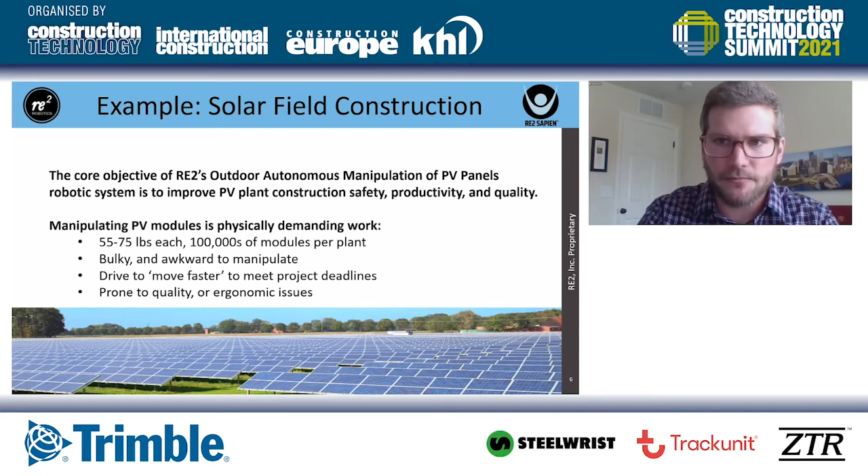Next, speaking to the solar developer level, margins for these projects are razor thin. And when you examine all of the various costs, delivery and installation of these modules represents the number one soft cost. That is the number one non-hardware related cost of constructing a plant.

When you examine the potential for robotically installing these modules, that holds a promise of making a real step change in efficiency that'll translate to real change in terms of the solar developer's bottom line, and also improve the ROI at which a developer will start to recognize revenue from this plant. So the faster I construct the plant, the faster I can turn it live, the faster I can start to make money as a developer.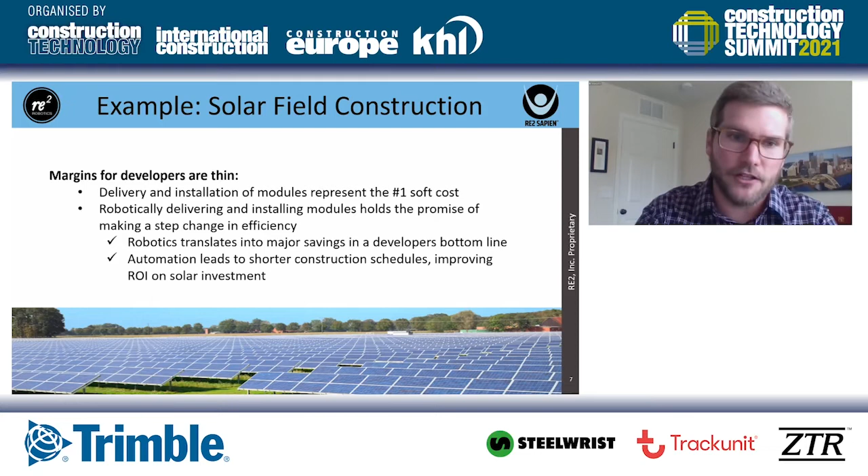And then third, speaking broadly to society, solar is still a fairly expensive form of energy when compared to other forms of energy, presumably those based on fossil fuels. So by automating portions of the construction process, we'll also be making access to renewable energy a lot greater compared to other forms of power generation. And additionally, there's a lot of mandates coming down from a variety of countries pushing for solar technology as being a new technology of choice as far as power generation is concerned.

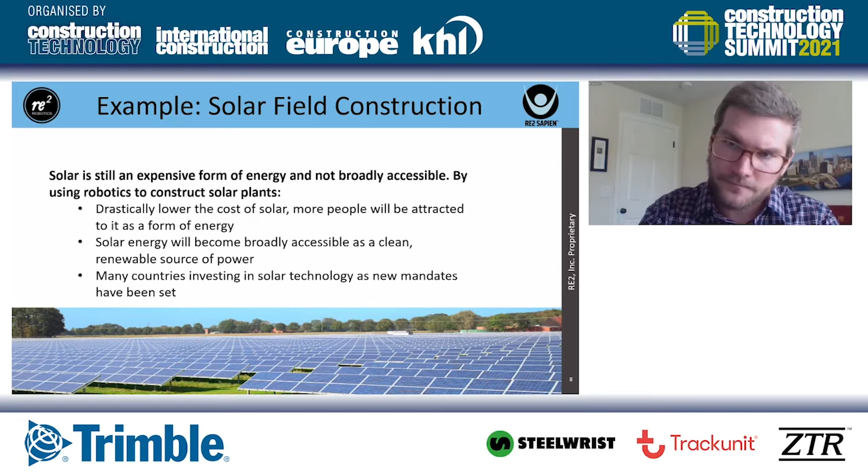So what does this all mean in terms of robotics? Here you're getting the first glimpse of the notional robotic system that we'll be developing through this O-AMPP program, which is basically going to fuse together computer vision, machine learning algorithms, customized end-of-arm tooling to grip those solar modules, an outdoor rugged autonomous manipulator, as well as a mobile elevating work platform provided by JLG to help manipulate those modules from their packaging and then place them onto their mounting points within the solar mounting hardware.

So we've envisioned this concept to be basically a variety of different autonomous vehicles that are going to work in concert with one another. First is an autonomous working vehicle, or AWV, that's going to be responsible for the picking and placing of modules. And secondly, there's an autonomous delivery vehicle that's going to act as a shuttle to present fresh solar modules to the autonomous working vehicle, such that there's not a lot of wasted motion.

In a current state today, oftentimes modules are staged, and then workers have to shuttle individual modules, several, if not potentially 100 feet to their installation point. In our concept, we're going to bring the material right to the point of use and then optimize the rate at which the robotic system picks up and places those modules directly onto their mounting hardware.

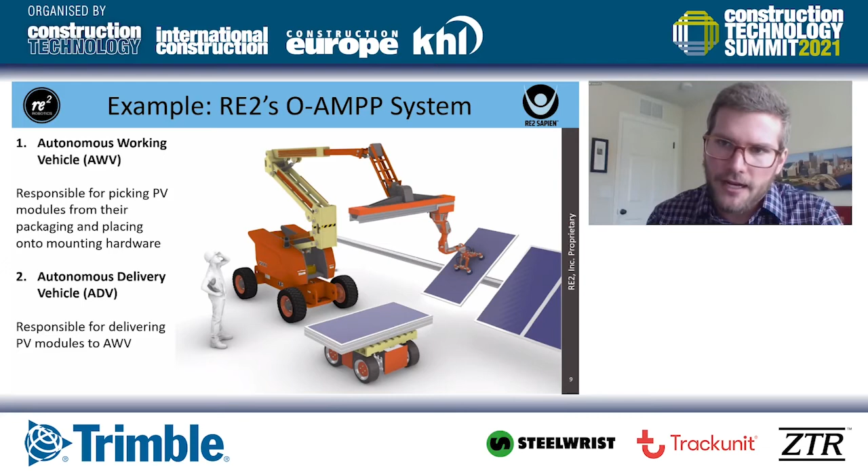We don't envision this as being the only place for robotic manipulation to make a serious impact on the construction industry. We envision at least two large opportunities looming in the distance. First is any application where you're performing work at height. I've listed key tasks we've gotten interest in: glazing or glass work at height, welding, rebuilding of facilities, and things as simple as inspection, like bridge inspection.

Often when performing this sort of work, it's very challenging to get ropes and hoists to deploy people down to the area of interest. We believe that by deploying even something as basic as a sensor via robotics, we have the opportunity to make huge productivity gains and huge safety gains overall.

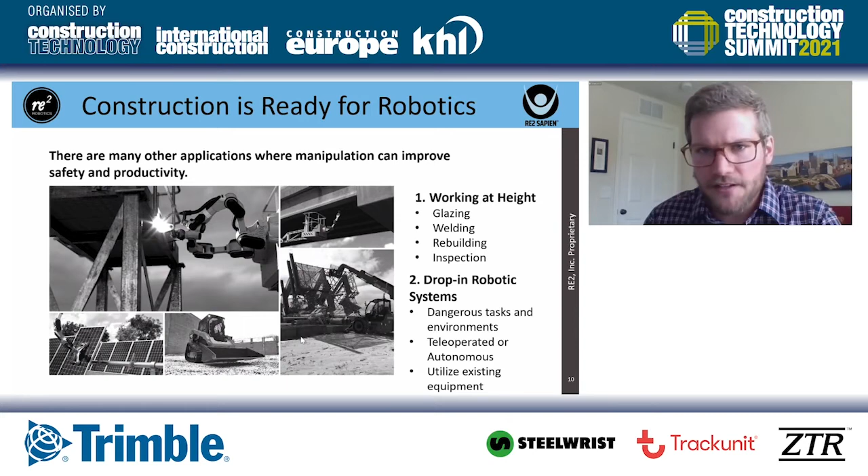We also have the opportunity to provide drop-in robotic drivers to existing implements. This is technology we're helping transition from the DoD space into the commercial space. Often people have large fleets of existing vehicles that might not have drive-by-wire solutions on board, so we can provide drop-in robotic drivers that can manipulate either the primary or secondary controls, such that operators can take a manned asset and make it either a teleoperated or fully autonomous asset long-term. So that's a couple of hints at where we see the future of robotics going.